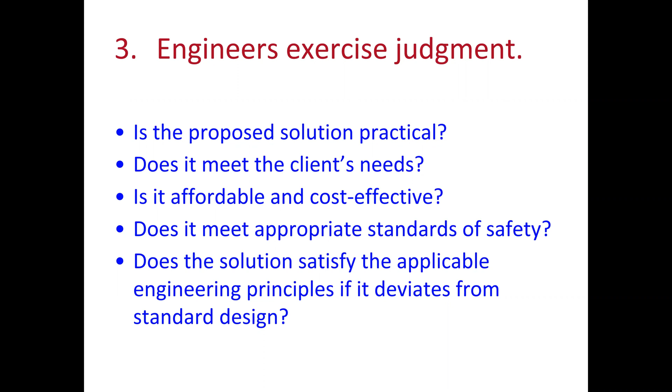The fourth point is that engineers must tell the uncomfortable truth. Before we read this, I want to introduce you to Roger Boisjoly. He was an engineer with Morton Thiokol who worked on the Space Shuttle's solid rocket boosters, and he was one of the first engineers to identify that the O-rings might be a problem.

This was a full year before the Challenger disaster. He had very adamantly recommended that the shuttle not be launched that morning when below freezing temperatures could cause ice crystals to open up more openings in the O-rings than were already present. He was overruled, and in the subsequent investigation, rather than hiding all the stuff Morton Thiokol wanted him to do, he became a whistleblower. Of course, he was not allowed to be fired, but that didn't mean he didn't end up with some dead-end work for the rest of his career there.

So Roger says: all of you must now evaluate your careers and emerge with the knowledge and conviction that you have a professional and moral responsibility to yourselves and to your fellow man to defend the truth and expose any questionable practices that will lead to an unsafe product.

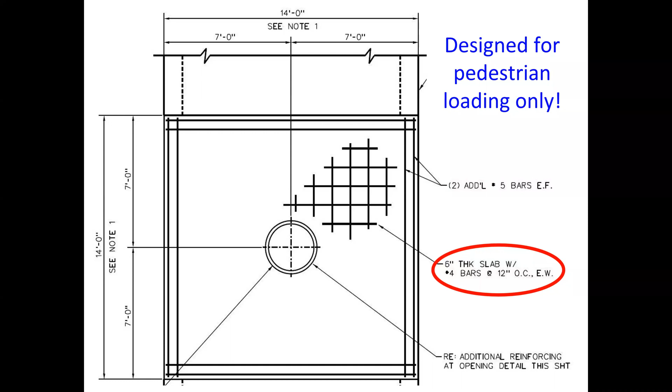And I asked the engineer about that. He said, well, it was designed for pedestrian loading. After all, it's off the street. Because who would really consider using a large inlet top for a vehicle work area? Certainly not an engineer who was designing by the book. But obviously anybody with practical experience knows that things are used for all sorts of things they were never designed for.

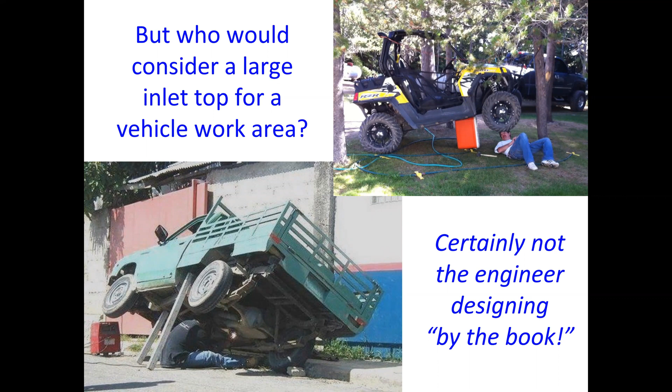Now, I'd like a brief example here for engineering due diligence. What tasks are required to prepare an engineering design for a public works project? This is a question that you would ask very first off when you're trying to prepare a bid proposal.

Let's say you've been selected for a job. Maybe, I won't call it a bid proposal, but you're coming up with a fee schedule. Well, to come up with a fee schedule, you've got to identify all the work items that you've got to do. So take a couple minutes here while we're talking about this. Think of what are some of the tasks that are required to prepare an engineering design.

This is actually better suited for a workshop, but I think we can do it. If any of you want to write them in chat, that's fine, or if you just want to make a list at your desk. Here's some that I pulled out from existing workshops and some of the work I've done before.

You've got survey and control, geotechnical investigation, subsurface utility engineering. Many projects you have hydrology and hydraulics. You may have maintenance records review. A lot of public projects, you'll have public meeting and stakeholder input. You may have design criteria evaluation. You may need to look at utility relocations and pavement repair if you're putting anything subsurface.

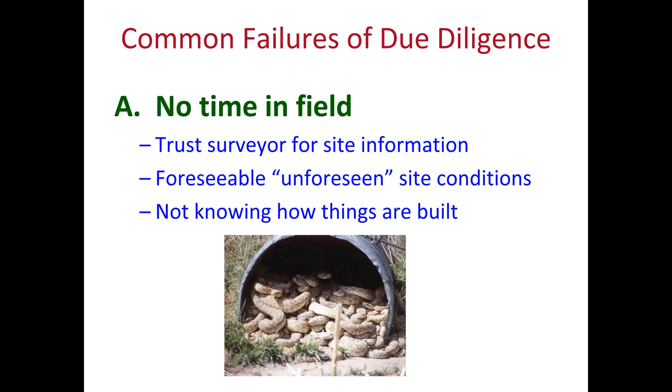Now, why don't engineers spend time in the field? Well, all of them think that this is what it's going to look like when you go out and look at a culvert pipe. I've been out in the field for most of my career. I have seen an occasional snake in the grass, typically running away or slithering away from where we were working. I've never seen this anywhere but this one particular slide. This was actually the background of it. This was not even a pipe in use. This was a pipe that had been stored for a long, long time out in a field. So don't be afraid that just because you go out in the field, you're going to see things like this.

So what do I mean about foreseeable, unforeseen conditions? We had a set of plans, didn't really catch this until the plans were already under construction, but we were upsizing a 24-inch line to a 42-inch line, trying to better protect one neighborhood, and it came down. They ran into a 24-inch line, RCP, outfall unknown, no plans exist. So the question is, as it got under construction, we realized there was going to be some issues. So did anyone look for the outfall unknown?

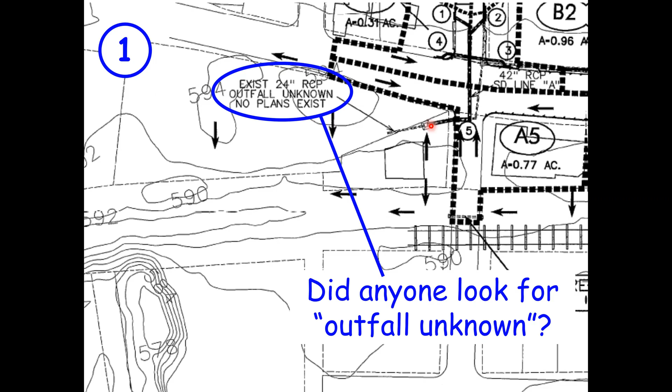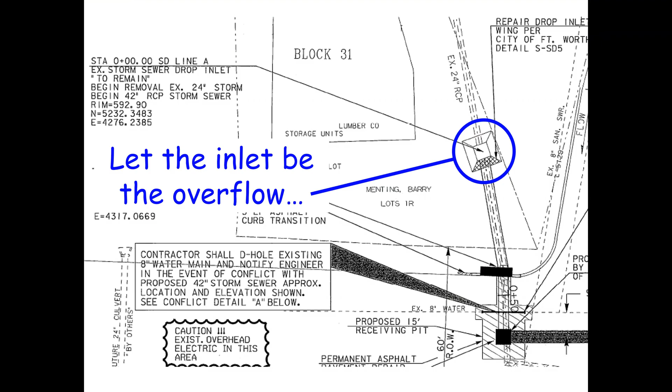Well, you can see if you look down there, the slope is heading down to those trees. But you can't find it sitting in the car. You can't even find it from the parking lot. But if you go down a little bit - is that water I see? Well, you follow the water upstream and you find a partially submerged headwall. Well, there it is. The reason that was important is because they had let the inlet be the overflow from the 42-inch pipe going to a 24-inch pipe. But unfortunately, it was overflowing right into a building. We caught that before the construction was finished, and we had them then upsize the design while everything is on hold, go back and design a 42-inch pipe extension all the way down to the outfall, down behind that gas station.

Here's another set of plans I ran into. This was a subdivision being built. I'll say this is about 20 years ago. They did extensive topo work on their site, and they even did topo work on the site of the electrical transmission right-of-way next to them. They got permission from the utility and were able to build that storm drain. And it just kind of stops, like it's on the edge of the earth. It reminds me of what everybody thought back in the day of Christopher Columbus, that somehow everything was going to fall off the edge of the earth.

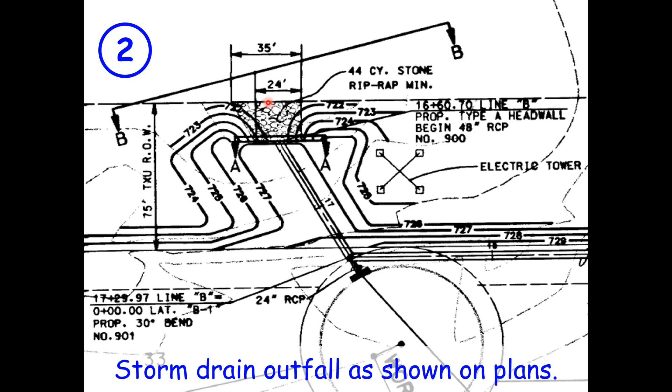So I had the engineer, I said, well, where does the water go from here? They pulled up a 1964 topo, and it showed they're going into a drainage draw on the next property over. I said, okay, that looks fine.

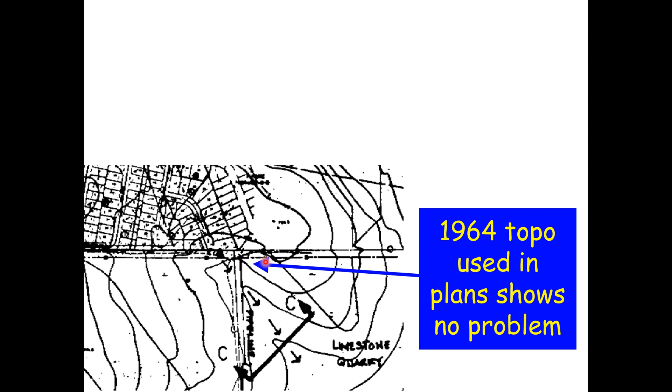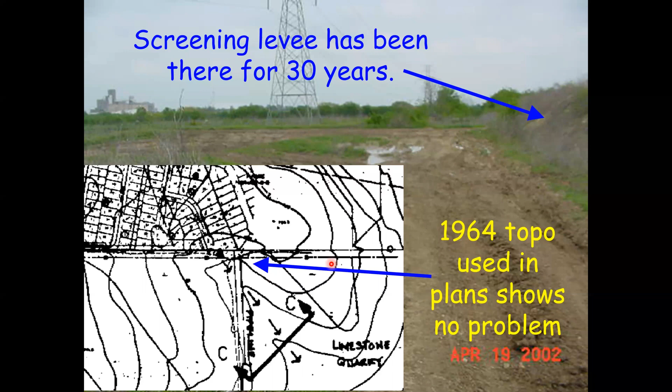But this was, of course, early 2000, and a screening levee had been built in the early 70s. This was actually a limestone quarry that it was outflowing into, and the levee was there to protect from view all the quarry work. Well, the contractor and inspector both agreed that this thing needed to drain.

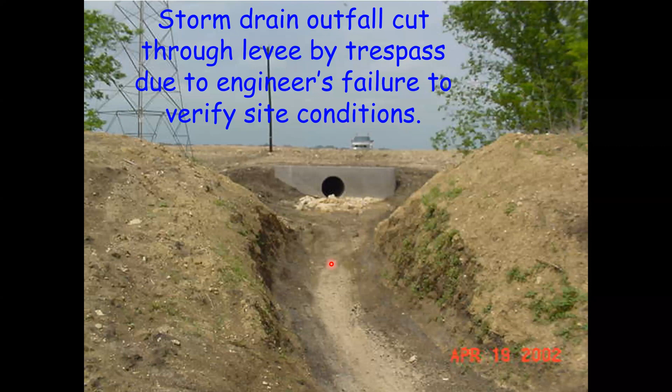So the storm drain outfall was cut through the levee by trespass, due to the engineer's failure to verify site conditions. The engineer never went out on site to look at this, never looked to see that there was a screening levee.

Well, it turned out there ended up being a legal settlement between the property owners. I was told it was in the six figures. Knowing what I know today and how prices have risen, I wouldn't be surprised if something like this happened today in the $250,000 to $500,000 range for settlement. You could go get permission for a whole lot cheaper than you can get trespass and legal settlement after the fact. Sometimes permission is cheaper than forgiveness.

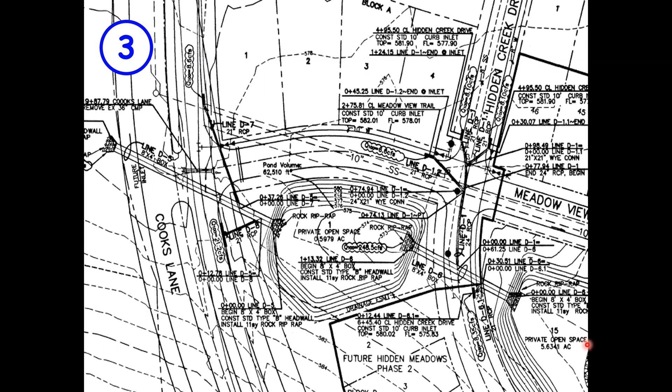It was another set of plans I looked at. I'm sure on the CAD screen all of these were different colored lines, but I always hated looking at these sets of plans, trying to figure out what line belongs to what. It was a new subdivision going in. Cook's Lane was an existing roadway. They upsized the existing line under Cook's Lane, and that was part of their drainage system as it went on down through their subdivision.

They sized this subdivision again - a very, very busy drawing, difficult to read. But on their drainage area map, you see 590, 595, the top is at 600, 595, 590. But the way these lines are drawn, that just doesn't exactly look right - that there's somehow a ridge at 600. And you look over here, and there's 600, 605, 610. It turns out these were mislabeled, probably by the surveyor, and this was really not even up at the top of the hill.

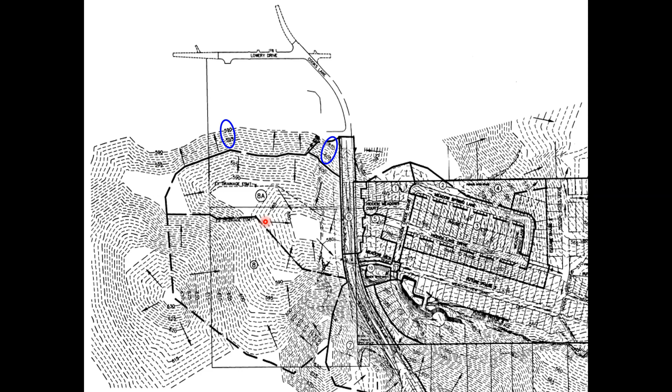So we did some more investigation and determined the actual watershed was about 3 times the size of the watershed shown in their particular drawings. It ended up affecting the culvert size, and they had quite a few remedial measures - I don't remember them all - but it was not a cheap solution. In our investigations, we even looked at the adjacent watershed. We had 1978 storm drain plans, and their watershed shown in yellow pretty much matched up to what we had in red.

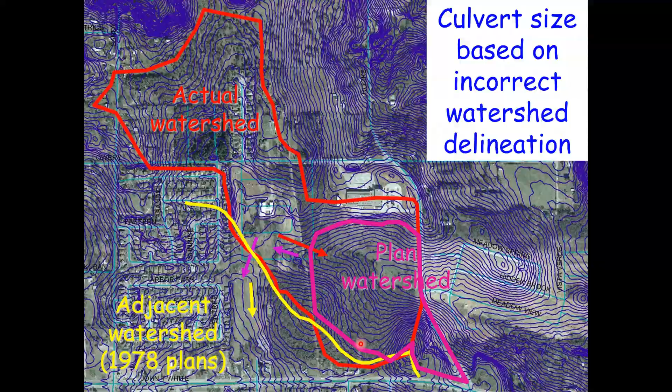And of course, with no time in field, you see projects, but you don't see projects after Mother Nature gets to them. I've talked to engineers on several occasions where they said, well, we've done this this way for years. And I said, well, have you ever gone back to your projects 2 or 3 years after they were built?

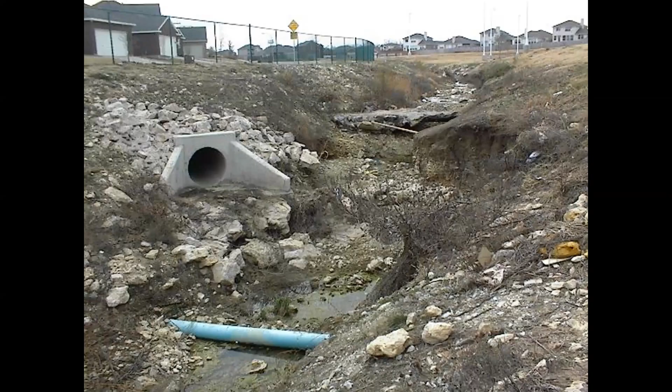This was a channel that was about 2 years old. That's a sewer line - there was a concrete cap on the sewer line to keep it from being eroded, but the erosion had actually gone all the way under. There was actually at one point a 6-foot deep scour hole there.

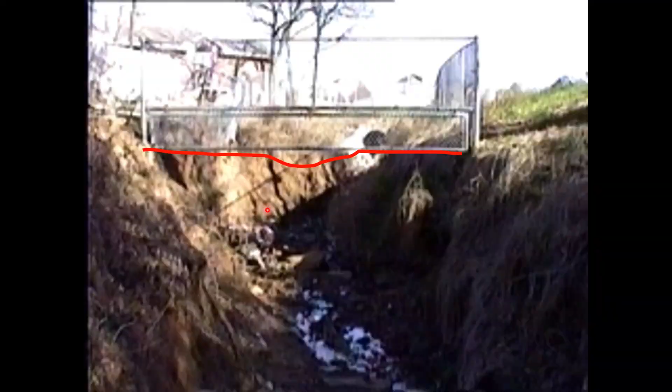There was another line - the channel was actually supposed to be up at this level. Here was another one, again, 2 or 3 years after construction. You see the pipe in the background.

Our best guess is that the existing ground was in red at one point, had the little flap gate, but a huge amount of erosion occurred because nobody had really bothered to look at how stable it was. It was actually dropping about 15 feet down into another creek, and Mother Nature doesn't like those steep waterfall drop-offs. She's trying to get a more stable grade, and of course you end up with this kind of erosion.

Another fear is you don't think through how things are built. Just because you can draw it doesn't mean it can be built. Just because it can be built doesn't mean it's sustainable.

I've actually seen a situation where somebody was trying to drain a field. The water used to run over the road, ran through a small culvert, but they're building a subdivision on the other side, so they're trying to get it all to go to one point. They were trying to put an 8-foot deep bar ditch about 4 feet off the edge of the road. Well, you could probably build it, but that wouldn't mean the road wouldn't actually be caving in within about a year or two of having been built.

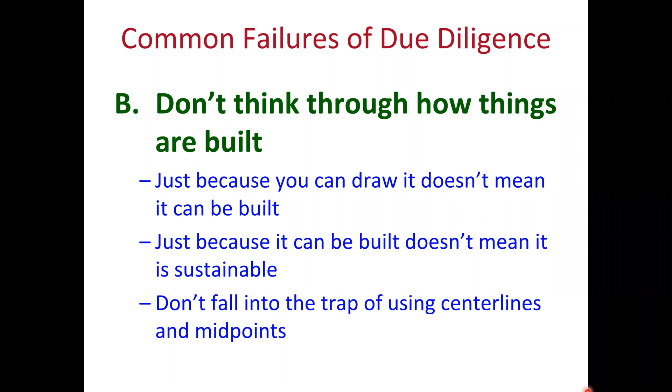Don't fall into the trap of using center lines and midpoints. We do designs and boy, we can snap to the center and everything looks so symmetrical. Here we have a storm drain inlet. We've got a pipe right in the middle of it, going right down the property line, with an easement on both sides.

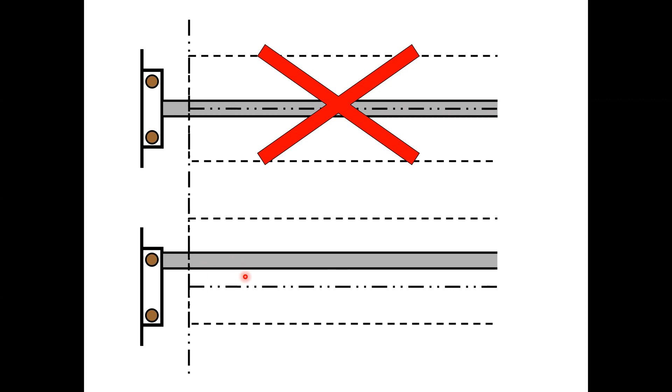Well, first of all, in Fort Worth, you've got to put the pipe tying into one of the inlets. Fort Worth had a requirement for a 2-inlet manhole, so the pipe had to go in that way so our cleaning trucks go in and go through the manhole and clean the line. You don't want to put a pipe right down the center line of the property. Otherwise, you might end up with something like this. Don't know what kind of pipe it was or what kind of machine they used to put those fence posts in, but obviously we want to avoid having these kind of problems.

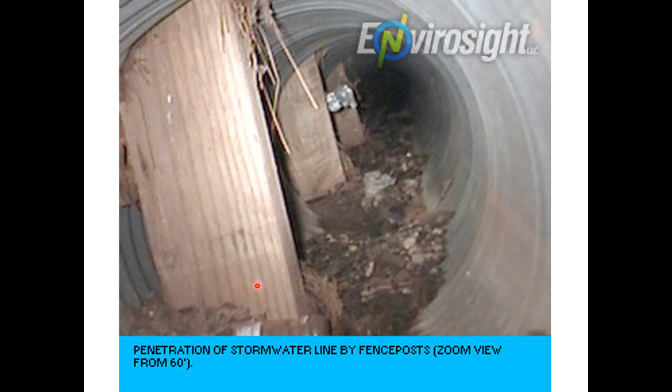Rushed, sloppy work is something I've run into a lot. It can be people trying to get comments cleared without doing the necessary rework. It may be a lack of QA/QC.

One of the things we ran into an awful lot was incorrect quantity. Somebody finally got done with the design, they're trying to hurry up and get the project out. So the last minute deal is, let's count up the quantities, put together our OPCC. Oh, we got to hurry up, we don't have much budget left. Let's just throw together the specs.

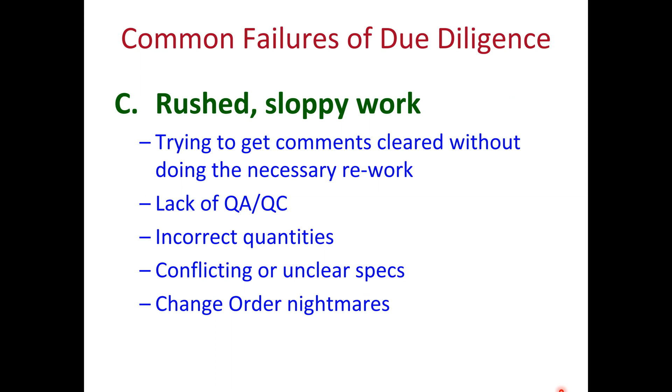And it ends up as change order nightmares.

When I was first presenting this, I actually had 2 or 3 specific projects and I tried to change the names. But the person I was working with, she was over these projects, and she said no, we need to make them far more generic than that. So I finally said, okay, why don't I just make this a consolidated case study? This will actually be things that happened at 2 or 3, maybe 4 or 5 different projects, but we'll just call this a Hades drainage improvements project. So again, this is not a single project that this happened on, but for the sake of protecting both the guilty and the innocent, we're going to consider this as a kind of an umbrella type project.

On one of these projects, we had multiple PM changes during the project. Overall, the project starts to drag out. Well, then the city becomes overdue on its commitments to citizens, and in order to satisfy that, the project was rushed through one phase of design. Unfortunately, that ended up being a very complex phase with several specialties.

And I have to say the city cut consultant fees too drastically. That's both on the consultant for not identifying all the work that really needed to be done, as well as on the city, because everybody always wants to get something for nothing, and cities are probably some of the worst. And then the change of project managers exhausted the project budget. I think many of us have been there in our careers.

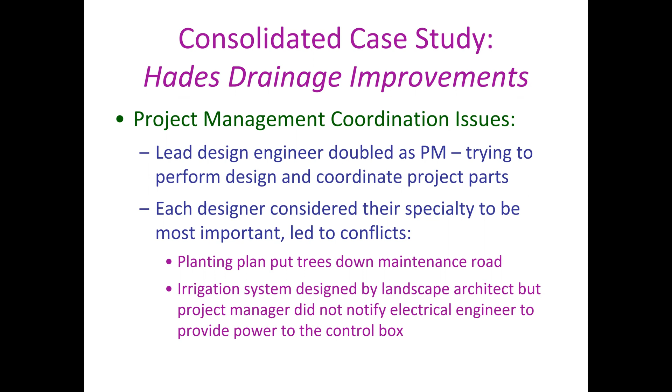Similarly, the irrigation system was designed by a landscape architect, but the project manager did not notify the electrical engineer to provide power to the control box. So now you can imagine the construction issues that caused.

These are just 3 of the big quantity errors that we've run into over various projects. Sidewalk, the engineer had less than half of what was actually in the project. Articulating block, less than a third. And fill material, the engineer had actually counted up less than 25% of the actual fill material that was in his own design, and that was a huge quantity.

In many cases, the contractor is working at risk to install extra quantities while the change order is processed. In the case of the electrical system for the landscaping, the plants died and the weeds grew while waiting on the design of the irrigation electrical supply. It was ugly, it was terrible. We had a lot of landscaping there because it was going to be in a very public location where it could be seen. And of course, it was a public relations nightmare with the site abandoned, Johnson grass growing, and all the planted landscaping dying.

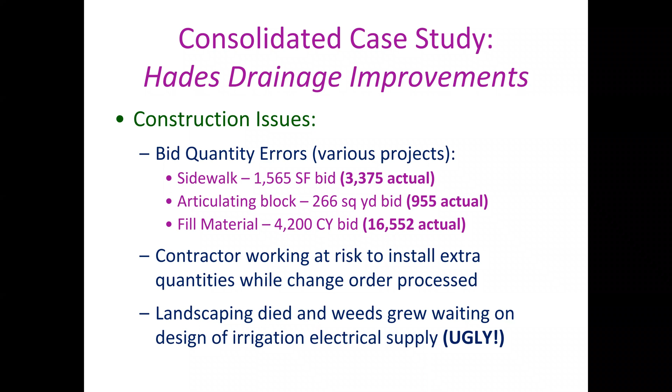There's another failure I would call full steam ahead, where you make assumptions early in a job and never revisit their validity until much later. These can result in unwanted or infeasible solutions, such as route selection, construction method, or design criteria assumptions. It's like climbing way up a ladder before checking to see if it's leaning against the right house. Unfortunately, the only way to rectify it is to go all the way back down to the bottom.

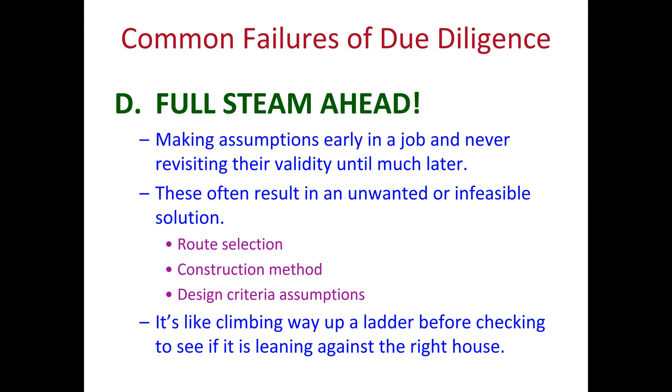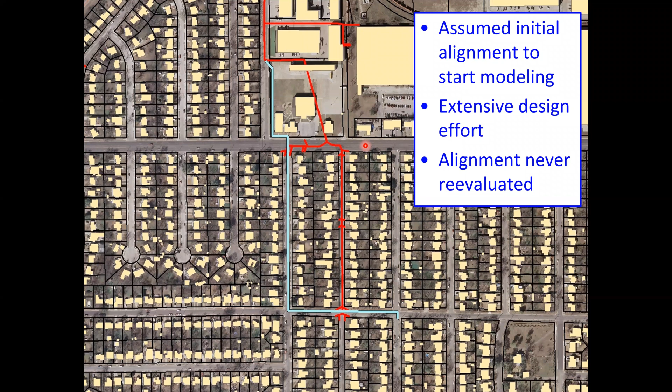I'll give you one example. We were upsizing a storm drain system. It was agreed that building a relief system would be cheaper than trying to upsize the existing system. The engineer's modeler wanted to get started on the model, so he assumed an initial alignment to start modeling. Nobody ever second-guessed that. They went through extensive design effort and never reevaluated the alignment.

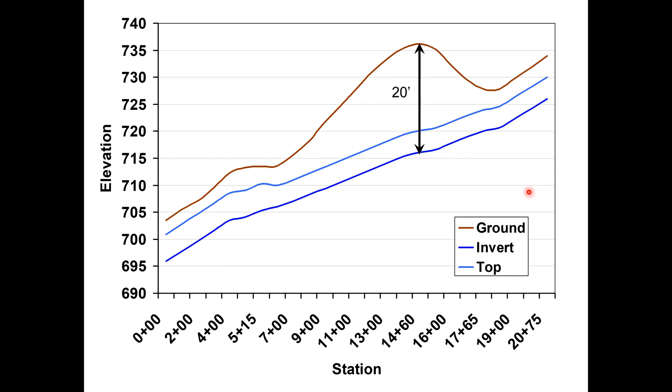If you turn on the topography, you see that it's actually going up a hill. It ends up happening that you have a section that's 20 feet deep, and in a residential neighborhood with other utilities in the street, that was just going to be way too deep to be practical. But if they had simply reevaluated the alignment and chosen the alignment shown in green, they would have found standard cover the entire way, and it would not have presented any issues at all.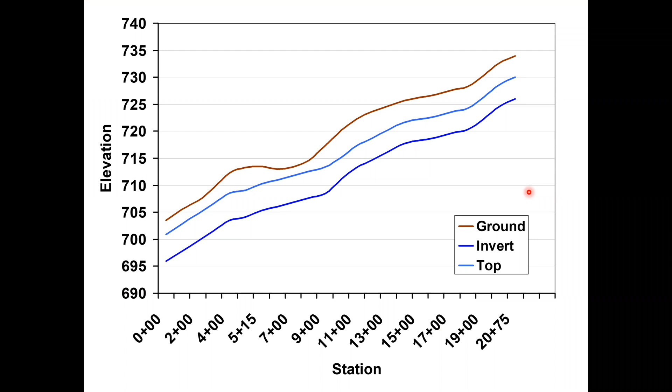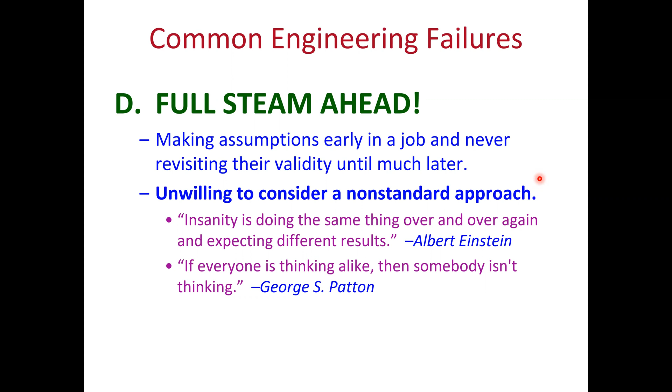You may also be unwilling to consider a non-standard approach. Albert Einstein said insanity is doing the same thing over and over again and expecting different results. General Patton said, if everybody is thinking alike, then somebody isn't thinking. I'll touch on this real quickly.

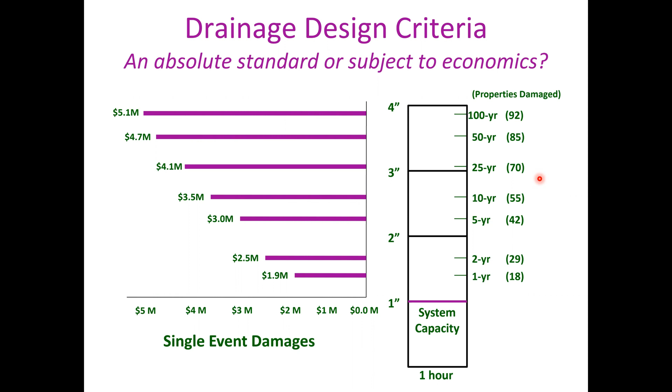We ran into a situation where we had a neighborhood flooding. As the floods got worse, the damage got higher. The actual system was only about 1 inch an hour, but if you looked at it on an annualized basis, all of the damages were down in this lower end. Going back to industrial engineering, we used an interest rate of 7% and a return period of 50 years, and the engineer determined that the existing damages were $36.5 million.

But if we focused on where the damages were occurring, and just raised the system from 1 inch an hour to 2 inches an hour, no, it wasn't anywhere near the city standard of 100-year protection for new development, it wasn't even a 5-year standard, but we were reducing the damage in that neighborhood. From the net present value of $36.5 million, we were actually eliminating $29 million of it. So the residual damages were $7.5 million.

So sometimes, if you're trying to make life better, if you can't make it perfect, you can always make it better. And you come up with things like this.

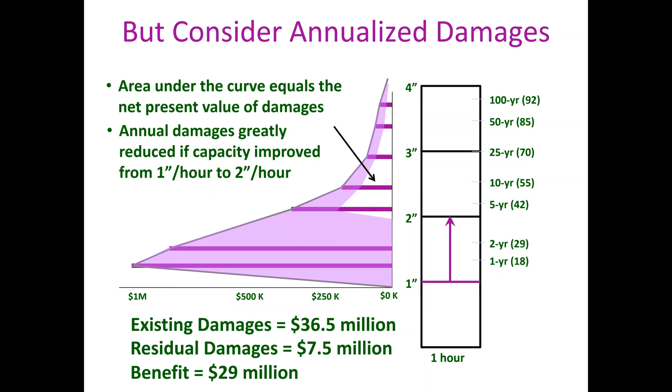Finally, there's giving the client exactly what they asked for without really evaluating the stated scope of work. The client said he needed this done, so you try to cheapen a project because the client doesn't have enough money, and generally no good deed goes unpunished.

It doesn't matter how good a job you think you did if the client's problem isn't solved, or if your solution is unaffordable or impractical. When I asked for solutions, I'd thought through some things, but hadn't worked through the project details. Sometimes I had things that weren't practical, and would rather have had the engineers or consultants tell me they weren't practical instead of designing the way I thought it would go. If I had all of those resources, I wouldn't have needed to hire them.

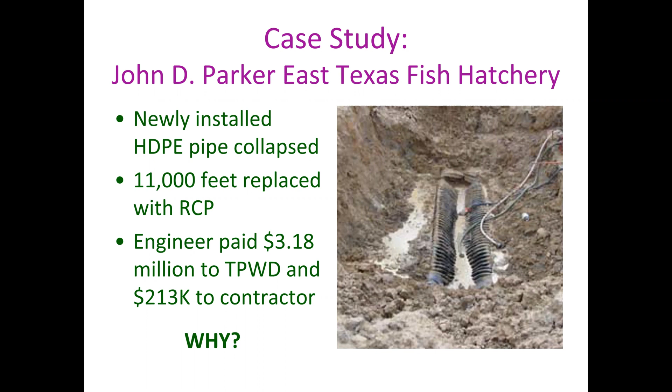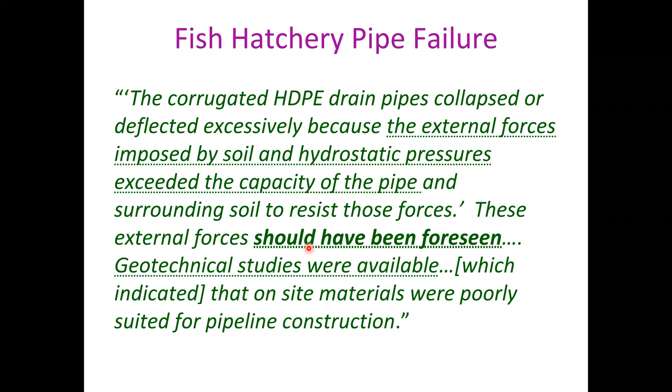The forensic analysis said that the external forces imposed by soil and hydrostatic pressure exceeded the capacity of the pipe. There's those words—should have been foreseen—because geotechnical studies were available. The engineer designed the pipe solely by using a chart, even though the chart did not account for the groundwater. That's what happens: you're trying to save the client money, so you use your EITs to do most of the design. You stick a chart in front of them and tell them to design it by this. The engineer should have more carefully chosen the type of backfill and degree of compaction.

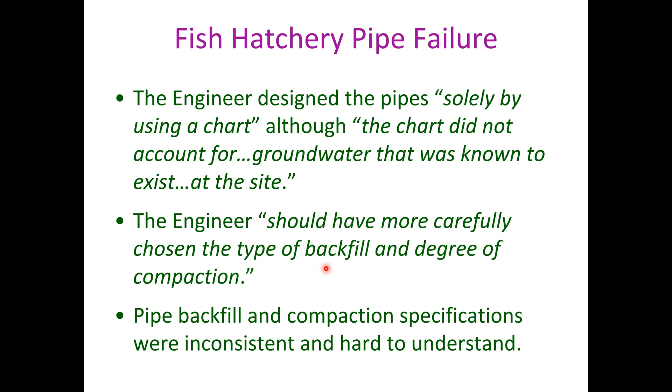I heard this from Danny Kaler at CECon back about 10 years or so ago. Cost pressures cause business leaders to make short-term financial choices at the expense of public interest and/or long-term financial sustainability. Clients and facility owners risk far more financial loss due to poor engineering than savings due to cutting corners.

Engineering judgment—we're going to, I know we're running short on time. Sometimes this presentation takes an hour and 15 minutes, and sometimes I do it in 50 minutes. So we're going to try and shorten things up here and get done on time.

Engineering judgment: forming an opinion or evaluation which conforms to the technical and ethical standards of engineering by discerning and comparing. It's developed through our training, our experience, our professional development, and all too often by our mistakes.

A man being honored for his success in business was being interviewed. What's the secret of your success? Good decisions, he said. How did you make good decisions? Experience. What kind of experience was that? Bad decisions. Most of us have had enough bad decisions in our past, or we've learned from folks who've told us about their bad decisions, that have helped us make good decisions.

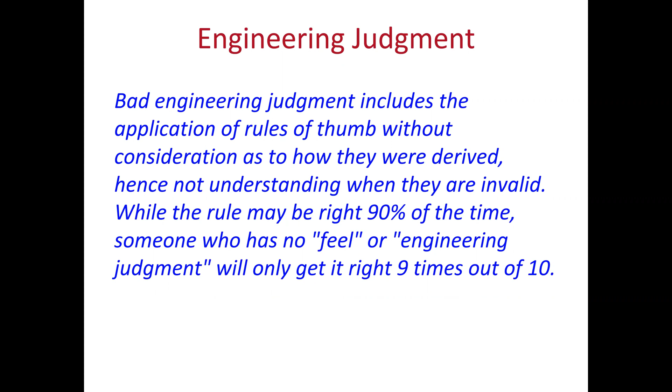Good engineering equates to good business, meaning that the output has to work not only technically, but in an organizational or commercial context. So this requires that we use our skill and professionalism to bring about good solutions that recognize the realities, again, of their business context. The solution's got to be economical, it's got to be cost effective.

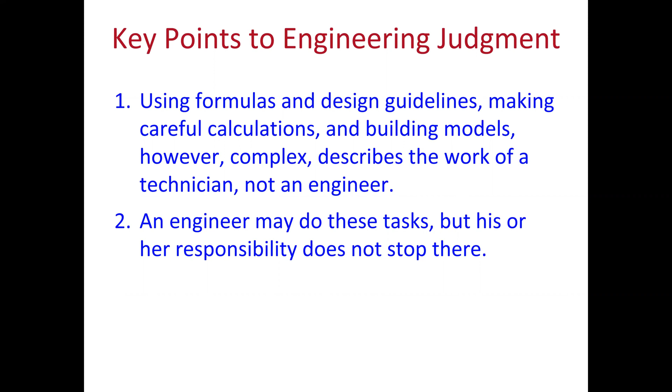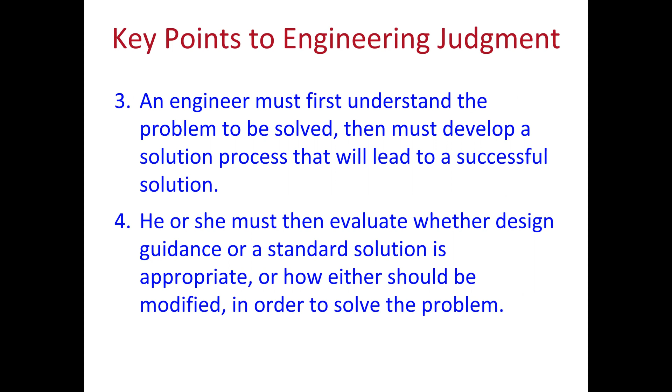Some key points: using formulas, design guidelines, making careful calculations, and building models, however complex, describes the work of a technician, not an engineer. An engineer may do these tasks, but his or her responsibility does not stop there. An engineer must first understand the problem to be solved, then must develop a solution process that will lead to a successful solution. He or she must then evaluate whether design guidance or a standard solution is appropriate, or how either should be modified in order to solve the problem.

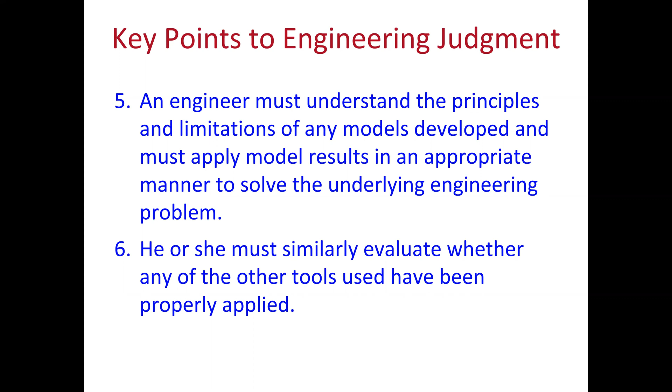An engineer must understand the principles and limitations of any model developed, and must apply model results in an appropriate manner to solve the underlying problem. He or she must similarly evaluate whether any of the other tools used have been properly applied. The engineer must then answer: does the proposed solution provide a complete solution to the problem? Have design deficiencies that may lead to failure been identified and addressed? And is the solution feasible and affordable? Only then is a solution complete and ready to be sealed and submitted.

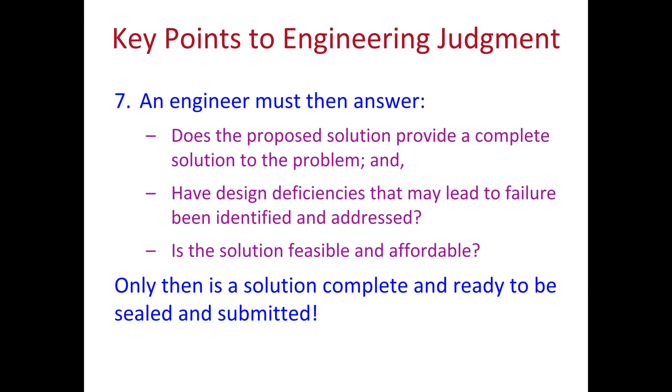In other words, don't depend on computer programs to the detriment of common sense. Don't let design standards blind you to the economics. If we'd done that, for example, we could never afford a 100-year system, so we would have let that neighborhood continue to flood, no matter how bad the damages were.

You don't want to jump to the immediate or obvious conclusions. You want to think things through. And the problem statement really is not build this, but solve this problem.

And with my apologies to the trained philosophers, a little Plato to go with Aristotle. Aristotle used inductive reasoning, inductive logic, build from the ground up. A little Plato is his deductive reasoning. You start with the big idea and you work down to the solution.

And finally, in closing, here's a quote. This is actually Dr. Goldman doing this on a TED Talk. In med school, I was obsessive compulsive and I did very well and I graduated with honors. And I came out of medical school with the impression that if I memorized everything and knew everything, or as much as possible, as close to everything as possible, that it would immunize me against making mistakes.

And it worked for a while until I met Mrs. Drucker. Then he went on to describe Mrs. Drucker as being the first person that he misdiagnosed and who died as a result of his misdiagnosis. And he goes on to further talk from there.